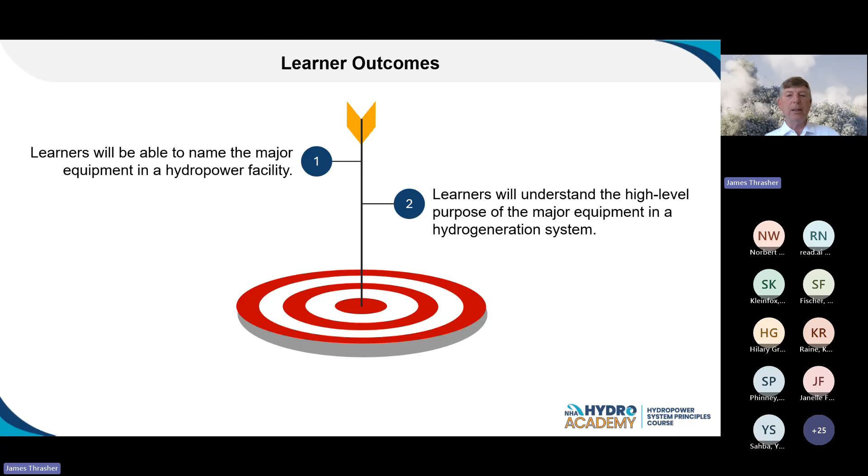So this is the title page, and what we try to do with each course is give a module overview: what do we expect the student to obtain from this course? We summarize that with this slide. Learners at the end of the course will be able to name the major equipment in a hydro facility, and understand the high-level purpose of the major equipment in a hydro generation system. That's the goal. We're going to talk about the large equipment in hydro plants, and then Jay will get into more of how that converts into how we use that equipment to make electricity.

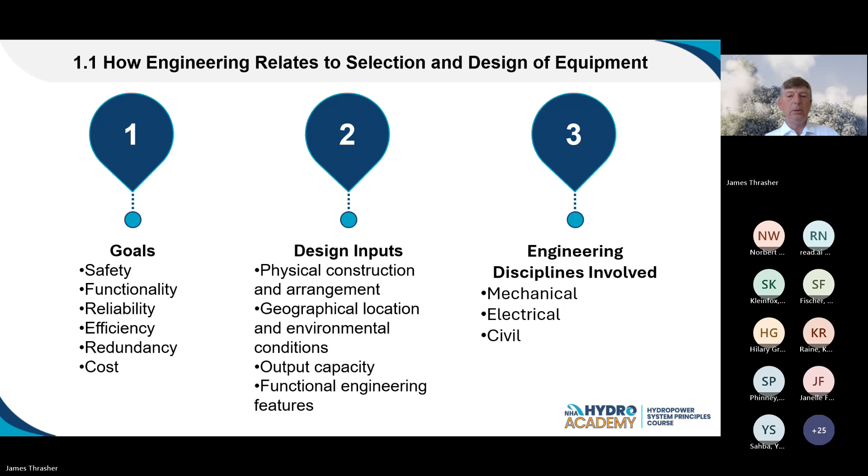Okay, so I'm going right into this. This is the full course, and I'm just going to hit the slides that are of interest today.

So dams, gates, spillways, water facilities, that's getting into the civil side of the equipment. We talk about what kind of dams are out there. What do they do? Well, they're a water blocking device that diverts water normally into a powerhouse.

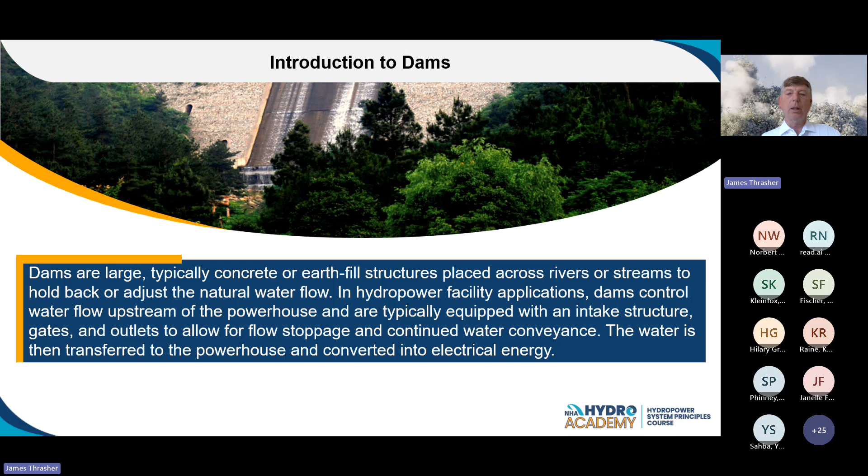So we talk about arch dams and how they function. We talk about gravity dams. We get into roller compacted concrete dams. We talk again about embankment dams and berms. And then we progress from there into intake gates.

The intake gates are gates that control the water into the turbines. So we talk constantly about the path of the water flow. Water's traveling down the river. The first thing it encounters is normally a debris boom or a boat barrier - boat barrier, then the debris boom. It passes beneath the debris boom, goes into the intakes, goes through intake racks into a penstock, flows through.

That's what you see here is the penstock. It flows through a penstock into the scroll case, and from the scroll case through wicket gates, and spins a turbine. A turbine is attached to a shaft. The shaft is also attached to a rotor. The rotor spins in a stator, and that makes electricity and goes out onto the grid. So that, in a nutshell, is the flow path of water.

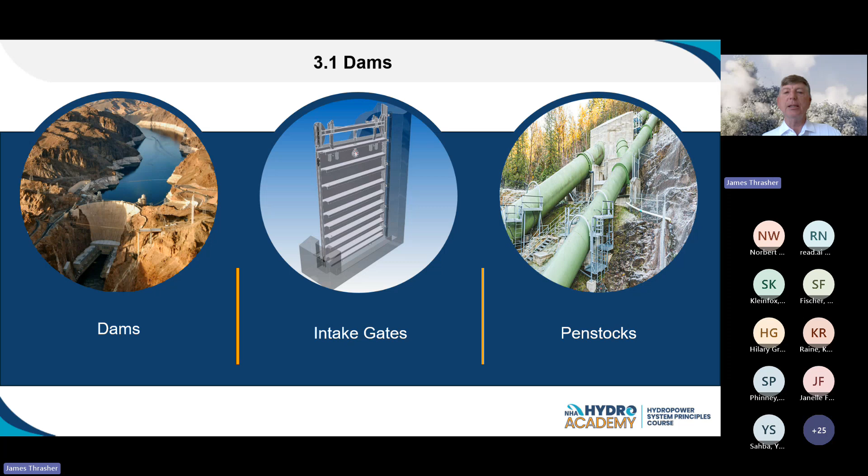The water exits into the tail race after passing through the turbine. So this slide, we talk about what do you do with the debris that's on a river.

So the debris that makes it past the debris boom gets caught on trash racks. The trash racks are right in front of the penstock. So when you catch it, you have to do something with it.

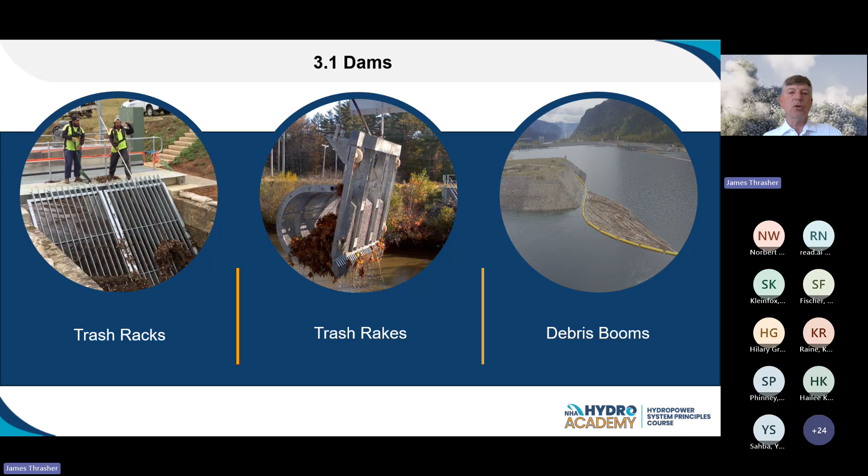So that's how we deal with, those are some major pieces of equipment that you'll see on a dam, and it's very important because trash is a problem at almost all dams.

This is a typical run-of-the-river plant. It usually has a water blocking device, a dam of some type, at a location on the river. It diverts water through either an open channel flow or through an above ground penstock, which is this one is an above ground penstock. That water goes into the powerhouse and flows through, like I was telling you earlier, the intake screens, into the penstock, through the turbine, and eventually out into the tail race.

The area that is bypassed in the river, this flow area here, that's called the bypass area, and that's where environmental rules and your FERC license comes into play, because you have to meet minimum flow. You can't just divert all the water into your powerhouse. That channel has to keep water in it for aquatic purposes.

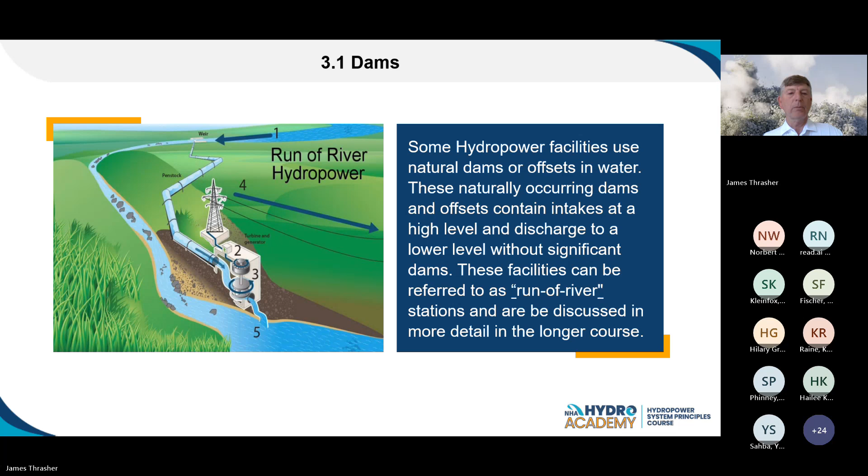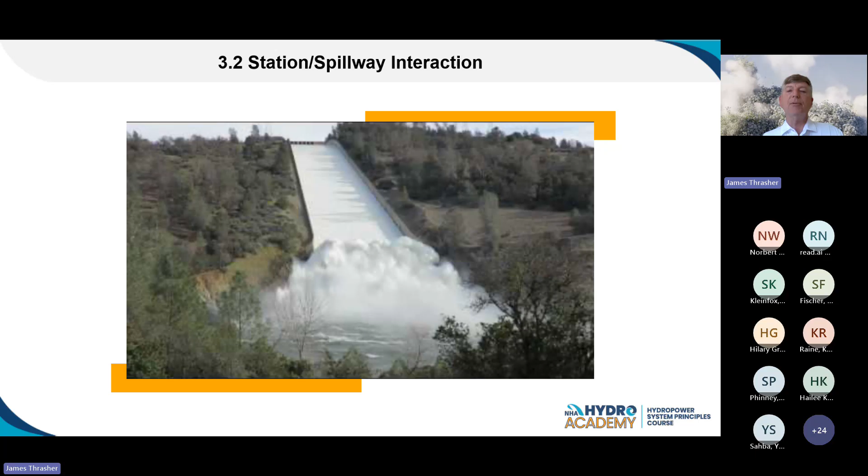So spillways, we give this as an example - this is Oroville. Spillways, the purpose is that every dam or powerhouse has its own hydraulic capacity. Let's say a powerhouse has 2 turbines, and at full load each turbine requires 500 cubic feet per second of water. So the hydraulic capacity of that plant is 1,000 CFS, 2 times 500. If the river inflow is greater than that and you can't pass it through your units, it exceeds your hydraulic capacity, and you have to spill it through spillways.

I'm going to do that. Okay.

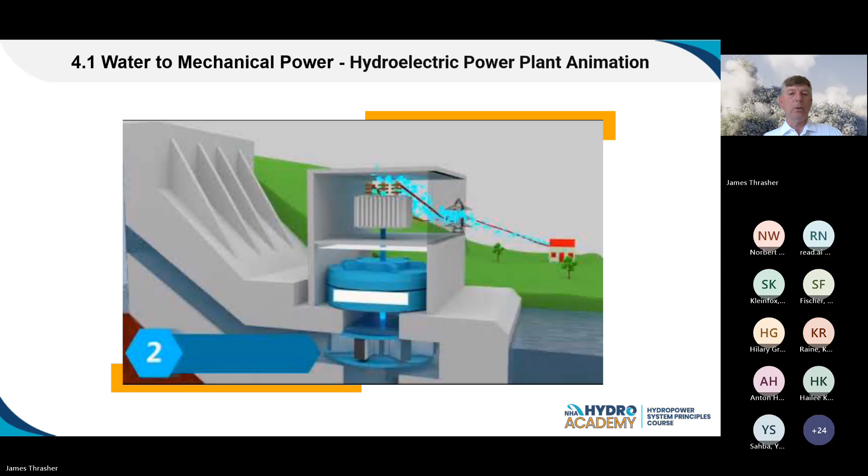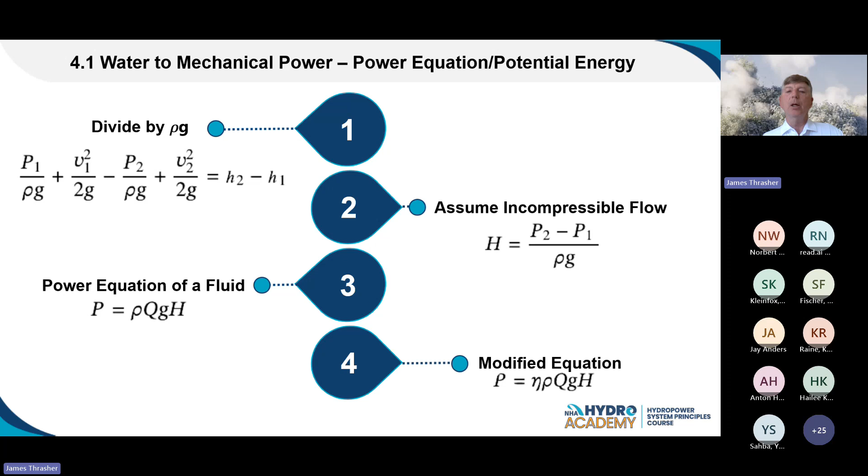Okay, then we talk about Bernoulli's equation, which simplifies down to power equals eta times rho times Q times G times H. Simplifying further, power in kilowatts equals eta, the efficiency of the turbine, times Q, the flow in the river, times H, the head - the difference between the forebay and the tail race - divided by 11.81. So theoretically, for any hydro site, you can calculate its nameplate capacity under perfect conditions. That's where we start when working with a plant to determine whether that site is optimized.

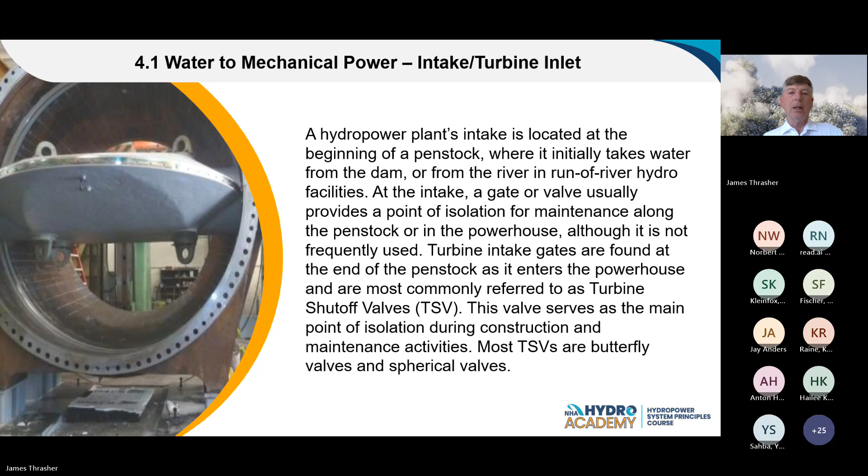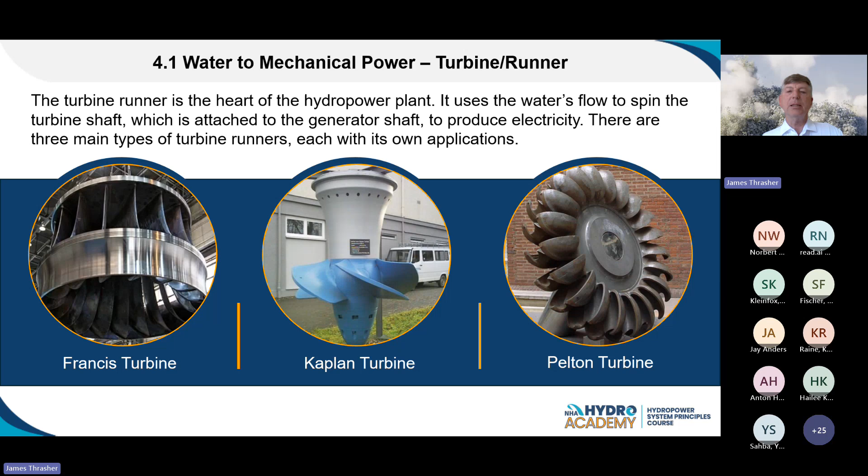I'm going to go into the major turbines now. There are three major types: the Francis turbine, the Kaplan turbine, and the Pelton turbine. About 60% of the turbines in the United States are Francis turbines, typically used in moderate head, up to say 600 feet. A Kaplan turbine is made for sites with a lot of flow but low head, somewhere in the 20 to 30 feet range. A Pelton wheel is used where you have little flow but lots of head, usually in excess of 1,000 feet - you normally see these in the mountains, in the northwest US, the Smoky Mountains of Tennessee and North Carolina, and Alaska.

So at that point, I think I'm going to close. Throughout this presentation we also have knowledge questions that are necessary, because if you take this course you get continuing education credits if you're an engineer and you need those. So in order to qualify, we have to do testing throughout the course. Are there any questions, or should I just close and let Jay take over?

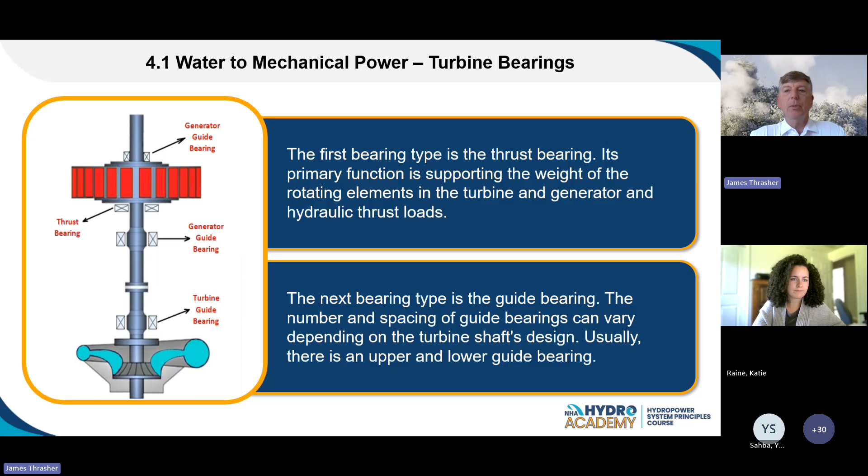Great, thank you. Like Jim, I'll click a few buttons here, probably embarrass myself, not intentionally. No, that's normally me, Jay. You don't do that. That's please, Jim. Please. Let's see.

All right, I hope everybody's seen a screen that says water to wires. Again, my name is Jay Anders. Some of you I've met, some of you I haven't. Jim and I have been friends for years. He gave a great overview of what the class is. We get together and, you know, Jim, I was sitting here as you were talking, I was thinking, man, we teach this stuff in an hour, and now we're condensing it down to 20 minutes. So we're really throwing stuff at you really rapidly. The group has such a diverse background - I heard one person say they were an electrical engineer, go electrical engineers, by the way. But obviously I know we have environmental folks, civil, mechanical.

When we give these talks, we're talking to a broad audience, and there may be some sessions where you think, oh, I know all that. The great thing is you probably don't know all of it, but over the course of the full day, there'll be so many things you end up learning in the other sessions we go through, like the 8 different modules. The water to wires module really is the real overview of the class. We set it up, go through the history of what's going on, but Jim really gave us a great overview.

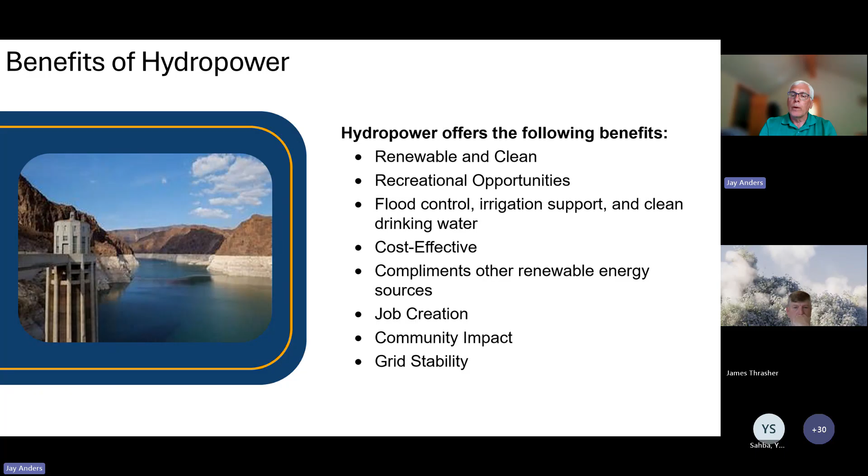Jim gave a bit of an overview, and his background is the mechanical civil side. Mine is the electrical side, and I really wanted to, as we start talking about how do we get electrons out of the water and onto the grid... Believe me, some people think that's what they do. They think a dam is a big screen out there, and we're screening the electrons out of the water, and there's less downstream, and the fish don't like that. None of that's true. You all know that.

We have, as Jim talked about, that penstock. That water is flowing in, behind our dam. That dam creates this difference in elevation, and that difference in elevation gives us potential energy. We get to the physics side of what's going on here. The water behind a dam is higher than the water in front of the dam, the downstream portion. We get that difference in elevation, and gravity acts on that higher elevated water. It wants to go to a lower elevation. That's how it has that potential energy. It's just sitting there waiting for the wicket gates to open. When those wicket gates open, that potential energy now starts to transfer itself into kinetic energy. That water starts moving, and that kinetic energy now goes and hits the next thing Jim talked to us about, the runner.

So now we have - let me put a little button here. Oh, this will be wonderful.

So we have that water coming in through the penstock, and we open these wicket gates. The wicket gates are just a big valve, think of them as a valve. We open that up, and it's a controlling type valve, though. We have the governor that's in hydraulic means that opens these wicket gates. They control the water that hits this turbine now. So now I have potential energy, it became kinetic energy, it starts hitting this turbine, and now I'm creating mechanical energy. This turbine is going to start spinning in circles now. As that turbine spins in circles, it's connected to a shaft. The shaft goes on up, and it's connected to my rotor. The rotor is the rotating portion of my generator.

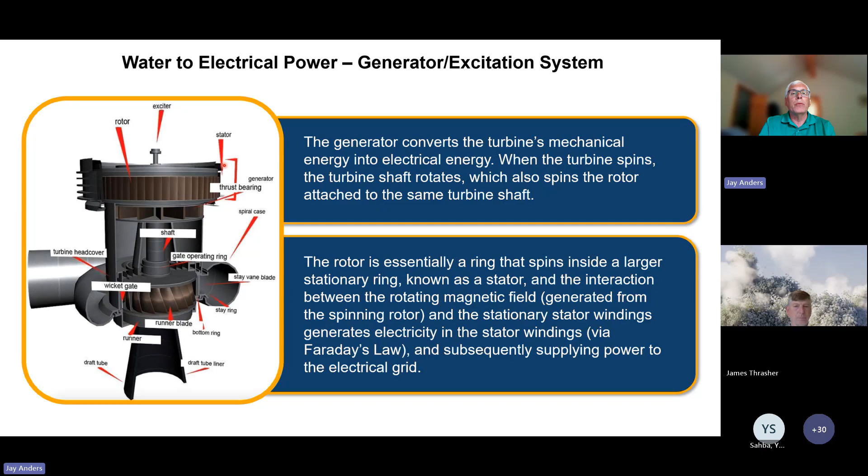I want to go to this next quick, some of the things you hear about. You'll hear about a generator circuit breaker. Well, a generator circuit breaker is a light switch, just a big old switch, on, off. Yeah, we have a lot of cool things that make that happen, all this protective relay and stuff, but sometimes it just switches. The operator will synchronize the generator to the grid.

He'll make the generator be in the exact same phase relationship. We'll always hear about three-phase systems, A, B, C. He'll make sure that the rotation of our generator is exactly the same as the grid, make sure the voltage is matched really well, because we don't want big arcs and sparks when we parallel, and then make sure that the frequency is also well matched. That way, as soon as we bring it online, it'll pick up a little bit of load.

Go back to those wicket gates. As we keep opening those wicket gates more and more, we can put more and more load. You'll understand that, right? It's like if you're pushing your car with your good friend when you ran out of gas. Your good friend, he goes to the gym all the time, big burly fella. He's working like anything pushing that car.

Well, you could lay your hands on the back of that car, you could wrinkle your face a little bit like you're really pushing, but in reality, maybe you're just leaning on the back of that car. You're still going the same speed, still going 60 hertz. One of you is working really hard, one of you is not working very hard at all. That's the idea of what we're trying to do, is matching my frequencies.

So this generator breaker connects my generator on out to a generator step-up transformer, the GSU. What it does: our generators typically generate at what we call the medium voltage range. Some of you think medium voltage range is high, but this is less than 15,000 volts. A lot of generators are around 13,000 volts. They're generating at 13,000 volts, but the grid is 161,000 volts, maybe 500,000 volts. So we have to step up that transformer.

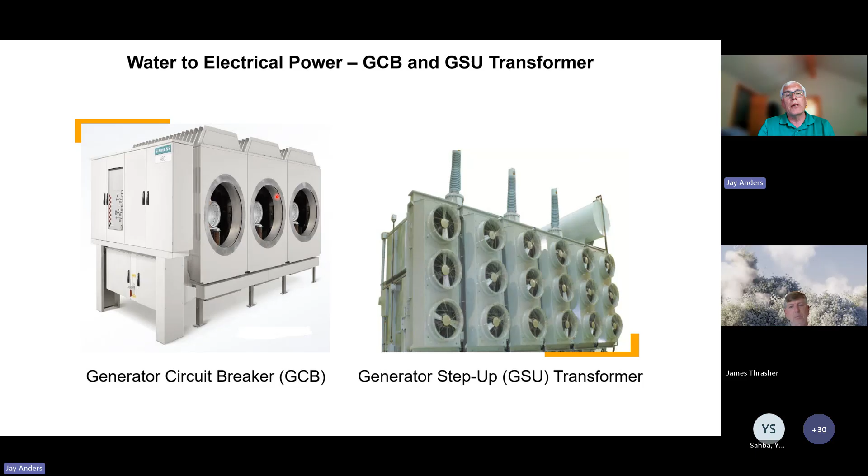So we come out of my generator, we go to my generator breaker, we go to my step-up transformer, and ultimately I get out to the grid. Now how about a little bit of a cartoon here, kind of tying together Jim and I's whole talk that we've done here over the last few minutes with you.

The generator now starts spinning. It has generator leads that go over to my step-up transformer, so I go from 13,000 volts maybe up to 161,000 volts. It goes out to the grid, and ultimately to everybody's house.

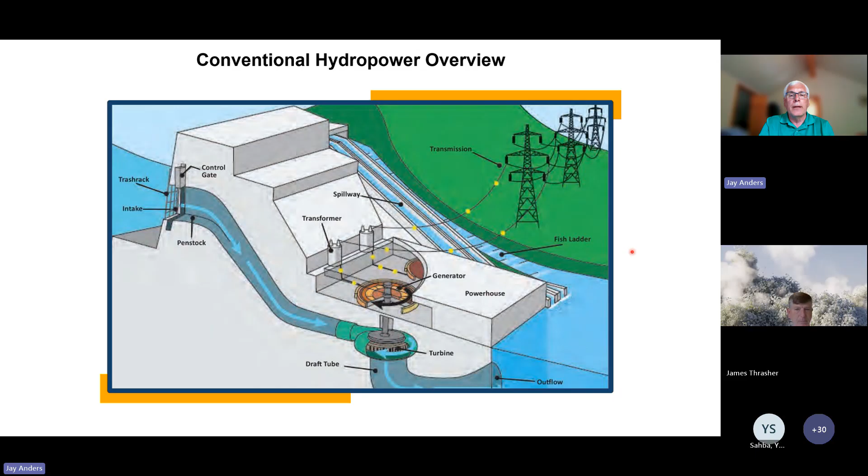Now, a lot of things we hear about nowadays are pump storage plants. So I just want to quickly touch on pump storage plants, how we connect them to the grid, because they are similar but different, right? It's a quick view of a pump storage plant.

Again, same idea, just another step-up transformer, a little larger, a little more involved. But again, it still gets us out, ultimately connected out to the grid and ultimately to your home and my home. So that's a real quick overview of how we get the power generated from our hydro plants, whether it be conventional or pump storage, and how we ultimately get that power out on the grid.

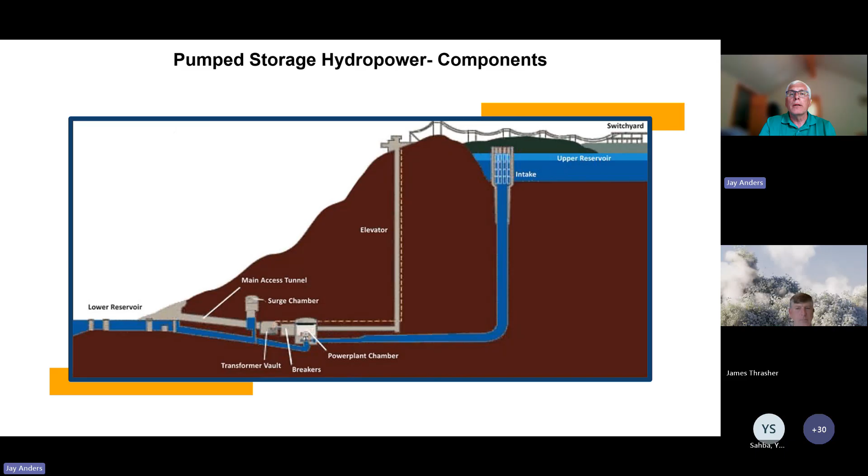I can start. I have a question for Jim on Kaplan turbines. Jim, you mentioned that you typically see them at lower heads. I've always understood Kaplan turbines to be very effective at changing heads due to the ability to control the blade angle on them. So I don't have a specific question for you on that, I was just hoping you could comment a little bit on the flexibility of Kaplan turbines.

Yeah, the Kaplan turbines are one of my favorite turbines. Unfortunately, the slide I showed you was actually, they called it a Kaplan, but it's a propeller, which is a fixed blade. But the Kaplans, the blades pitch and they can adjust to changes in head. It gives you a lot wider range of operation. It does great with combating cavitation. So yeah, it gives you a wider range over those low head facilities, which optimizes the production of the plant. Perfect, that's interesting.

Yeah, it's interesting, Jim. You know, I saw a lot of Kaplans we had at TVA, and we put them in thinking that the pools were going to change and elevations were going to be changing. But in reality, as the environmental side came along and we started focusing a lot more on that, we stopped having those big changes in elevation, and we went in and thought, okay, if these are the pools we're going to operate at, we actually, much like you're noting, made them a fixed blade at that point. We said, this is how we're operating the reservoir, so there's no need to change them. And again, because the Kaplans have the oil going to them, I think there's other mediums they're using nowadays, different things to think about. But yeah, great topic, we could probably both talk way too long on it.